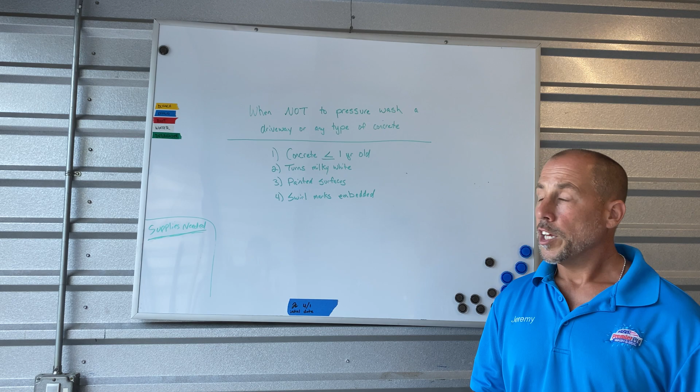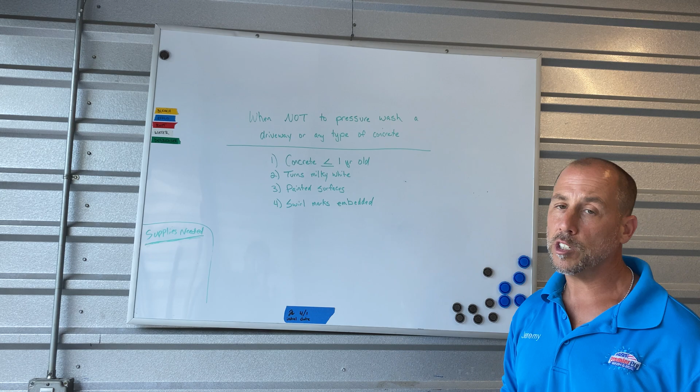When not to wash a driveway or concrete. You're going to get tasked for jobs sometimes. It's very rare, but we need to go over these scenarios in case you do get tasked for a job accidentally, and you get out to wash concrete or a driveway and you notice one of these things. You need to be cognizant of what to do and educated on it.

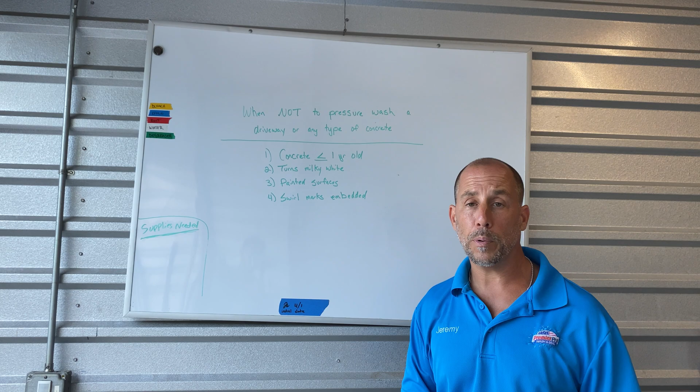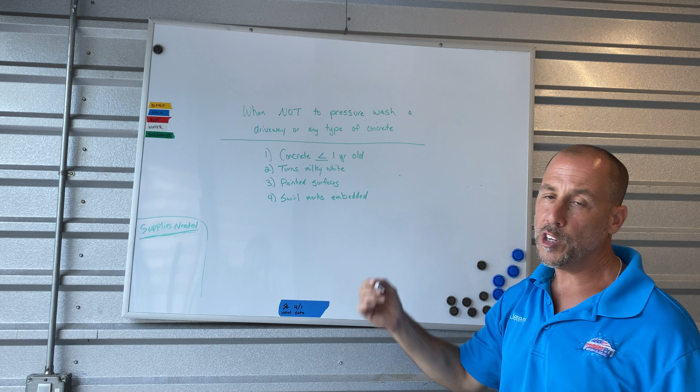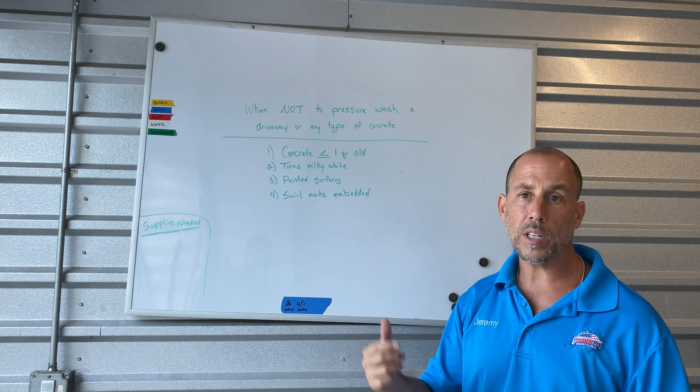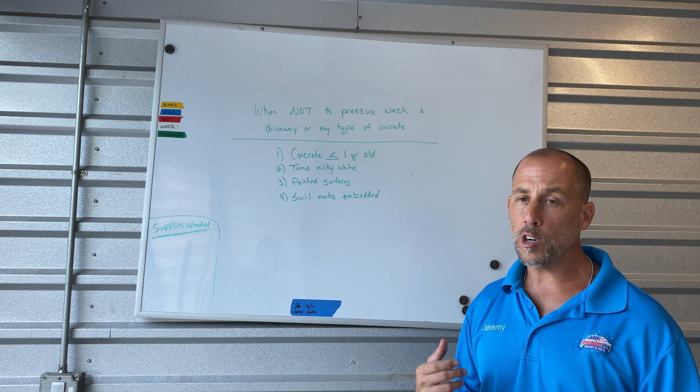There are times you'd never want to put pressure on concrete. One of those times is if that concrete is less than a year old. How would you know if it's less than a year old? If you can't talk to the homeowner and find out, just Google that address and see when that house was built. That will pretty much always tell you when the driveway was poured as well, unless they had an extension or something. But if that concrete is less than a year old, you want to be very careful putting pressure on it. If you're going to wash that driveway and run into that circumstance, that would be a time you would soft wash it versus putting pressure.

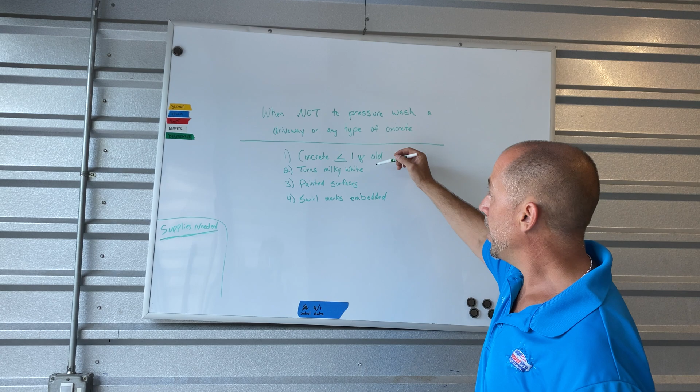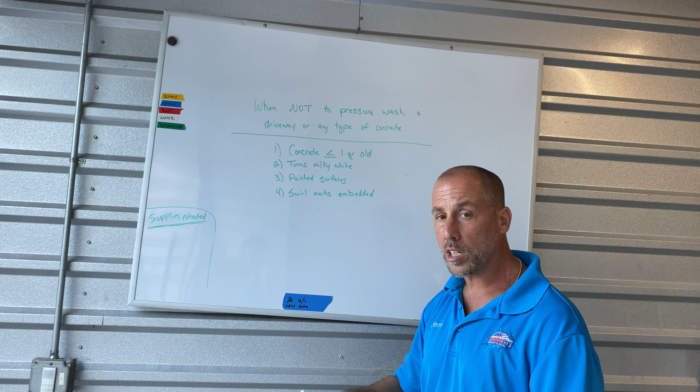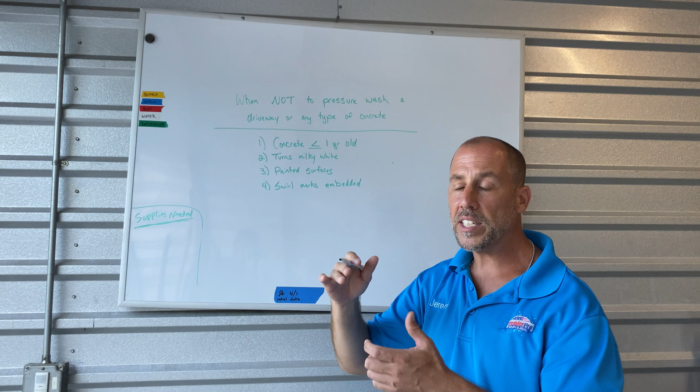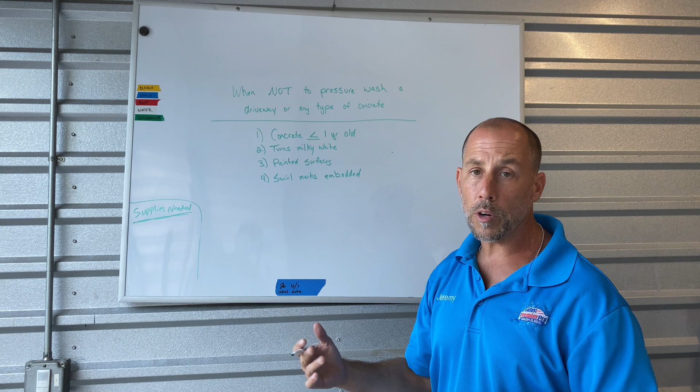Another time is even if the concrete is a year old or older, anytime you're surface cleaning—you'll know it without a doubt, it's evident. If you're running a surface cleaner and all of a sudden the water coming off it becomes real milky white, stop immediately. Do not proceed. Rinse off that concrete. The top layer is called the cream coat. It has not cured enough, and when you see that milky white, you're taking the cream off that concrete. So you need to stop immediately, let the homeowner know why you can't proceed, and go from there.

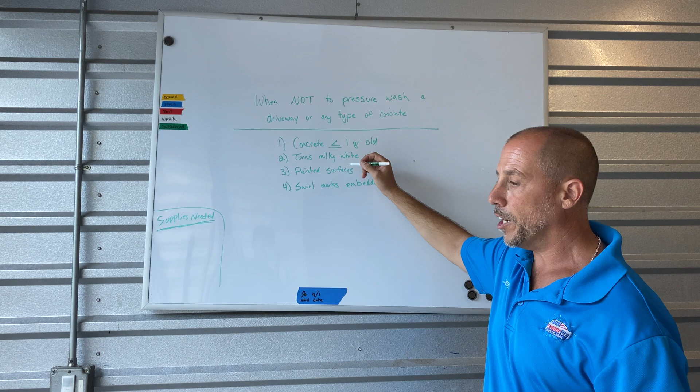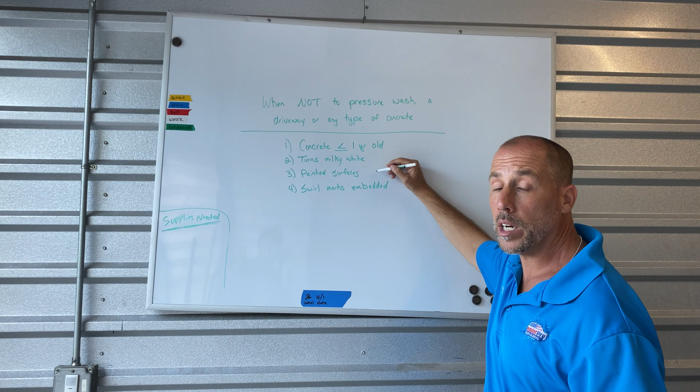Another reason is any kind of painted surface. A lot of these retirement communities have painted driveways. When you run into that, especially if there are signs of chipping, paint coming off, or fading, you don't want to put more pressure on it, because then you'll be responsible for taking the paint off. If a customer has a painted driveway and is adamant about wanting you to pressure wash it anyway, we need to make sure they sign off on a waiver before we proceed, so we take any responsibility off our hands. But for any painted surface, 99% of the time, just do a strong soft wash with chemical only.

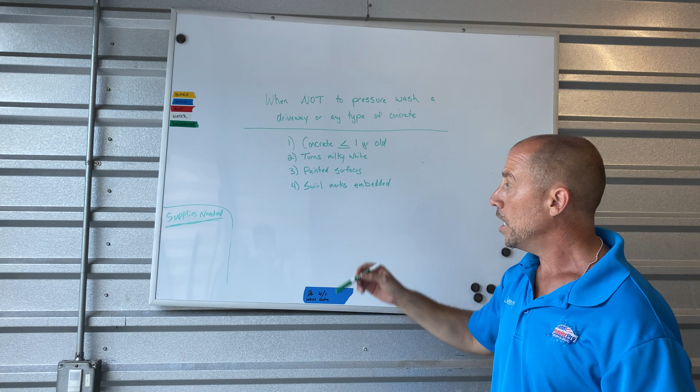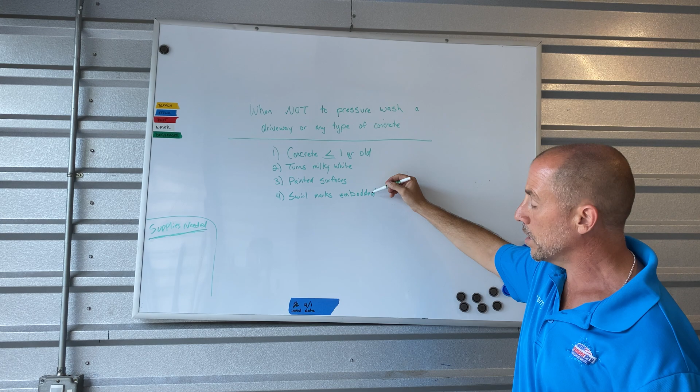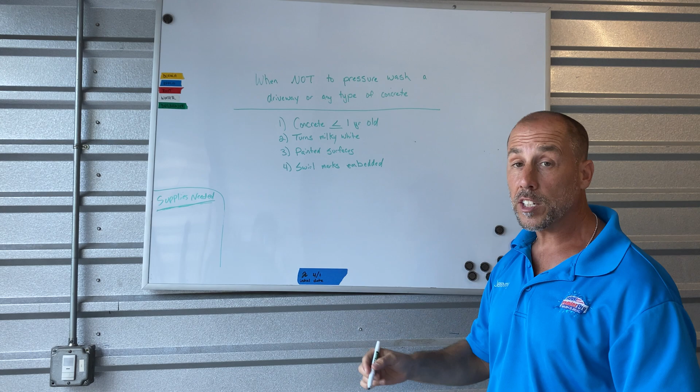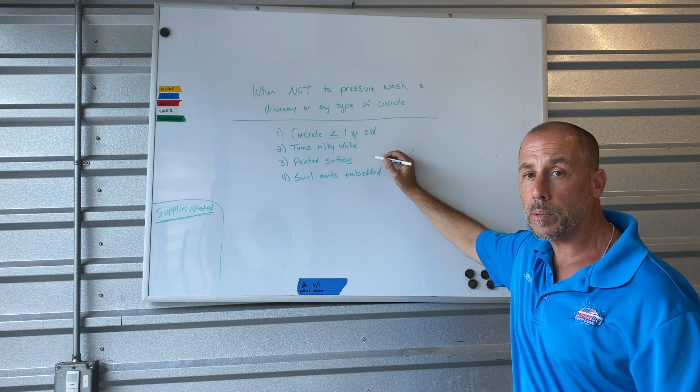Another thing that coincides with the milky white issue: if you're running that surface cleaner and look back, when I say swirl marks, I'm not talking about the kind that happen because you're going too fast—that just indicates you're going too fast. If you look back and those swirl marks are actually embedded deep into the concrete, that again means the cream of that top layer hasn't cured. So that's another reason to stop immediately and proceed with a chemical wash only.

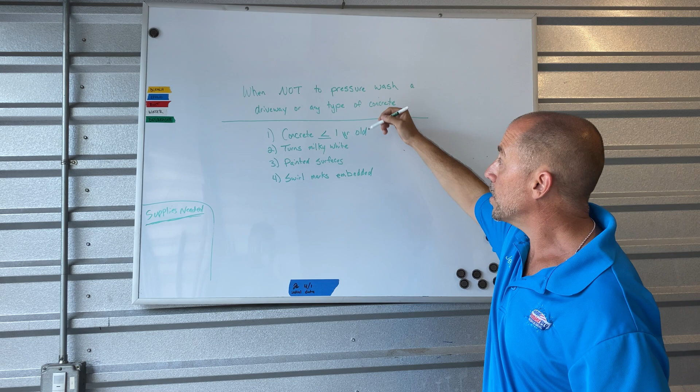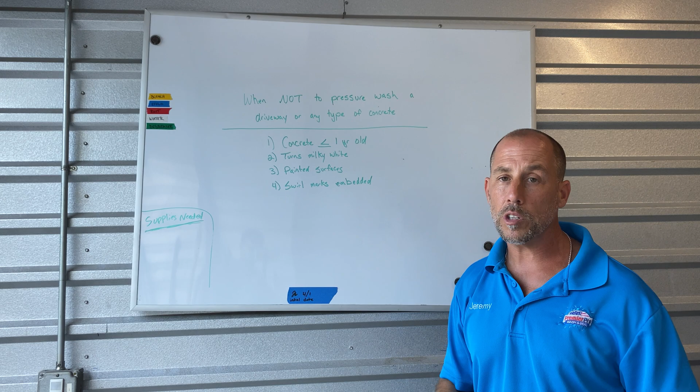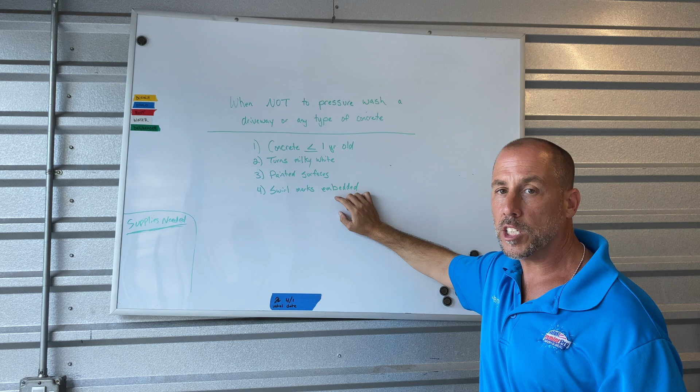So these are the reasons, or the signs, to look for when washing concrete. Make sure the concrete is past a year old, it's not a painted surface, and realize that even if it is older, every now and then you can run into one of these other two circumstances where it turns milky white or shows swirl marks. If that happens, just know you need to stop immediately. Other than that, you should be safe.